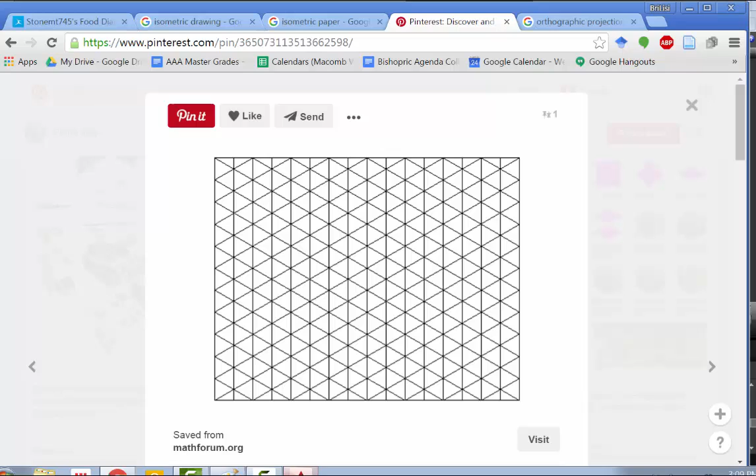To start this out, I need to introduce you with a couple of pictures. First of all, I have a better picture right here of a type of orthographic paper, also called isometric paper. This paper is a series of triangles, each stacked on each other, and it's specifically used for the drawing of three-dimensional objects.

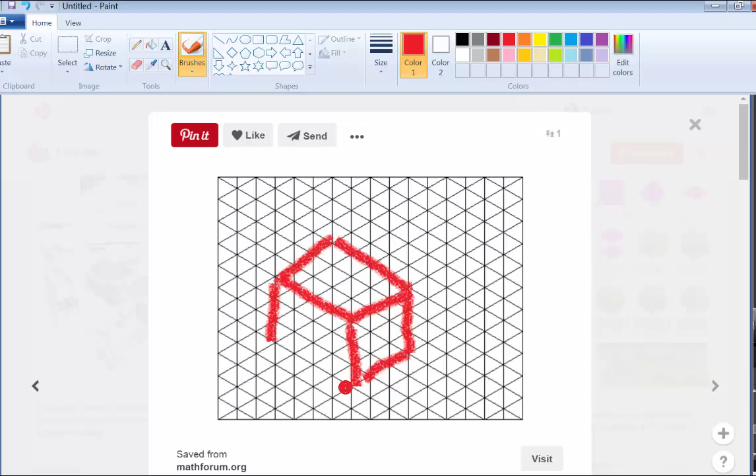I'm going to draw a quick box over the lines, following the lines there. See how that follows. As I follow these lines, I can create not a very good one, but just a basic box of what we're looking at. So this here is a three-dimensional projection, also called an isometric drawing.

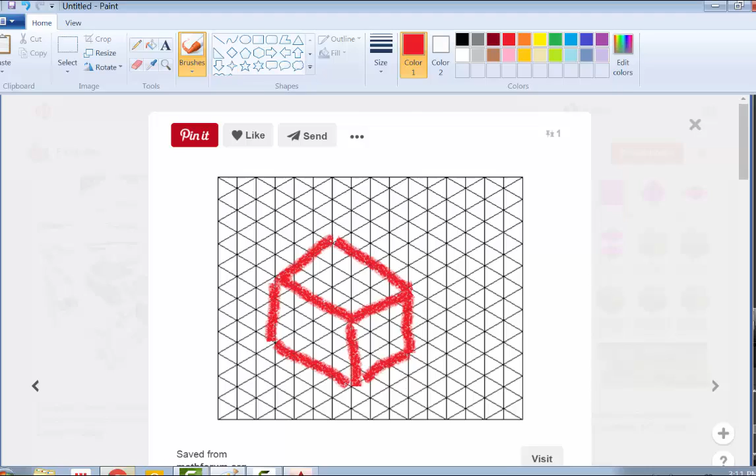So again, I wanted to outline to you the type of paper used for drawing things like this, as well as the projections themselves, as shown on the website there. And lastly, I want to show you something called an orthographic projection. This is from engineeringessentials.com, their website.

On the left here, you have an isometric drawing. It shows the top, and they've labeled them: the front here, and then the right side. This type of labeling is fairly common for basic graphics communication demonstrations. Usually this side that's off to the left on an isometric drawing is called the front, the top would be here as well as this lower section, and then you have the right side.

But on the right hand of this isometric representation, you have each section. For instance, the front is shown as if you were looking at it from straight ahead, straight on. The top is shown as if you were looking at it from directly above the object, and of course the right side as if you were looking straight from the right side.

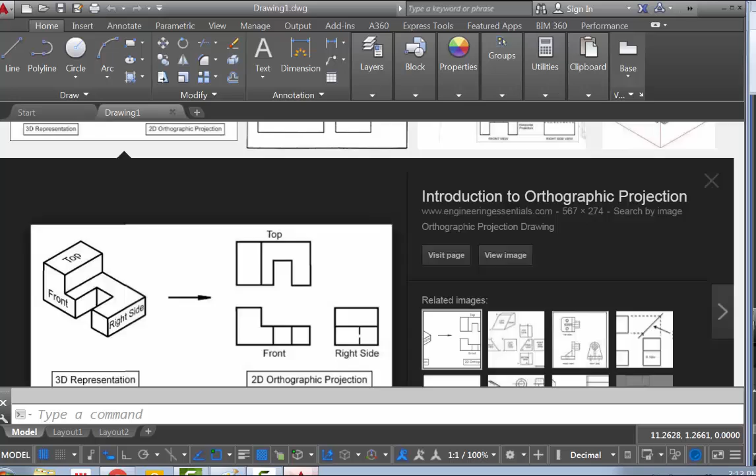This set of projections is called a two-dimensional orthographic projection, and in this case it's a set of three. Typically we call them, in this course, front right top, or top right front, however you want to order that. This is the type of drawing we will be spending a good amount of our course making in this class. Today we will go through our first set of drawings here on AutoCAD, and I'm going to demonstrate some of the basics on how that's done.

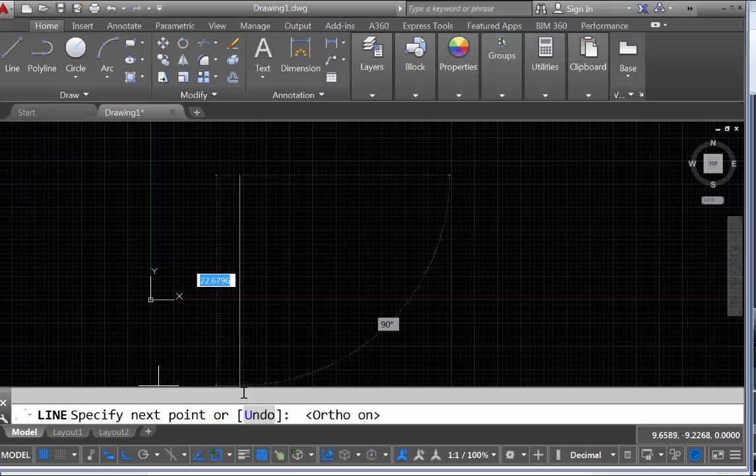So in AutoCAD, I'm going to move around my screen a bit. Typically you have an X and a Y axis. So the first point that we start with in drawing an isometric drawing is we draw an X and a Y axis, on a piece of paper or in this case on the computer screen. I'm going to turn my ortho on so that my lines come out perfectly straight, and then make this about 20, close to 20, and that one about 20.

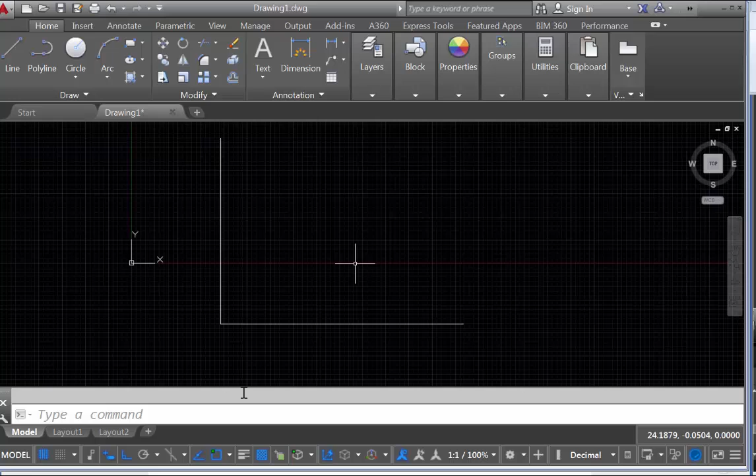Now, for most of the assignments that we have, I'm going to escape a couple times. Most of the assignments with orthographic drawings, like today's, we will start with an X and a Y axis, and then we need to label three sections here. This first one will be—I'm going to put a text here. I'll put the height at about, let's just say 1. I'm going to turn my ortho off.

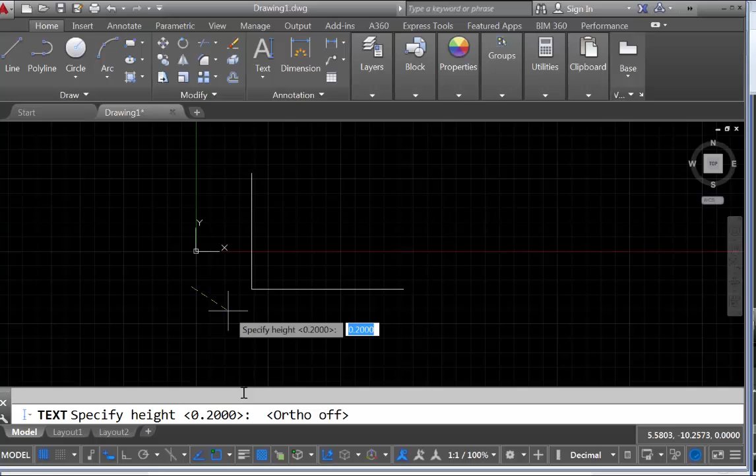Height at about 2, let's go with 2. At an angle, I want it to go left to right, so I'm going with a 0, and then it will leave my cursor there. I can type in 'front' and then push enter and escape.

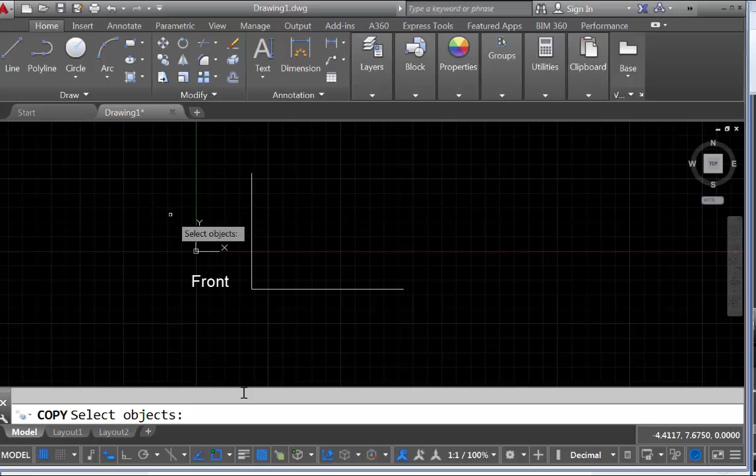Now I'm going to make a copy of this. There's my copy command here. Copy the front—I've selected it and push enter, and then specify a base point.

I'm making a copy of that, and as I specify a base point, I now have 2 copies of the front there, but I also have a front listed there. You may be asking why I'm making 3 copies of this front. Well, really I'm just making a copy to edit the text up here.

So I double click. Oh, excuse me, I'm going to undo that - I didn't mean to move it. So I double click, push Control Z to undo it, double click that and it highlights it.

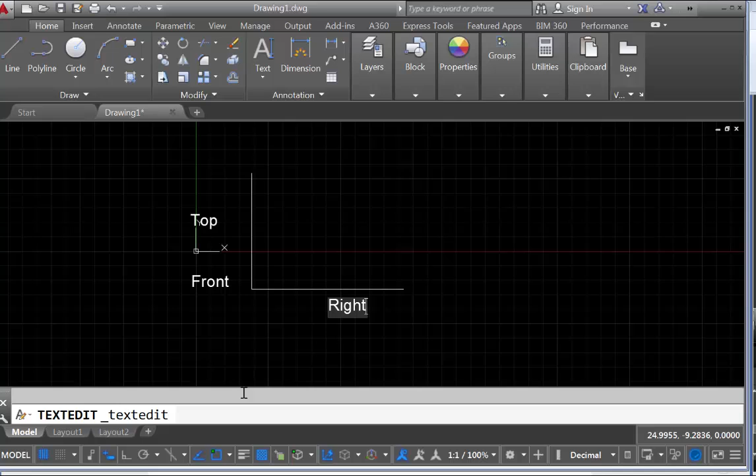I'm going to call this top and enter. I'm going to call this right and enter. Now let's go back to that drawing that I have of the orthographic projection.

You see I have a front, right side, and a top. So my labeling is similar. Also notice that this front drawing, the line here on this edge, lines up pretty well with that top line. And same thing with this right side of the front drawing - it lines up with that.

And that's something that's important to do on a lot of the drawings that we do in this course. Same thing with your front - the top there of the front, as it lines up, it goes to the top of the right and the bottom as well.

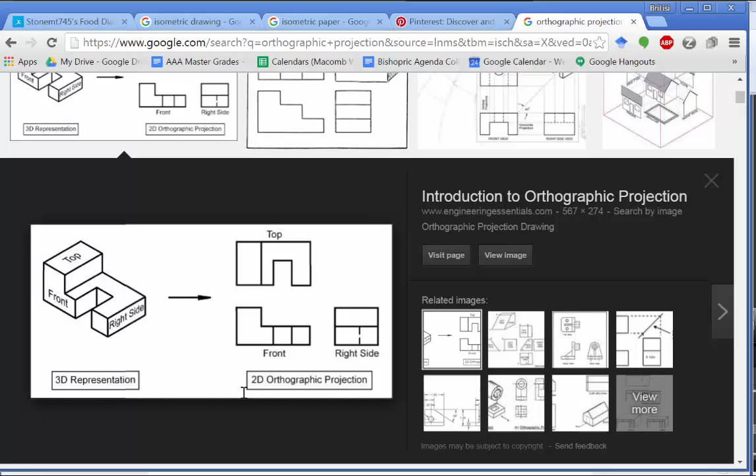So we're still setting up our front, top, right drawing. Now notice here it's kind of in the way of this origin line. So I'm going to go ahead and select everything. I mentioned how to select.

I'm going right to left. So I've clicked on the right, left click, and then go across it and click again. Now I have selected everything.

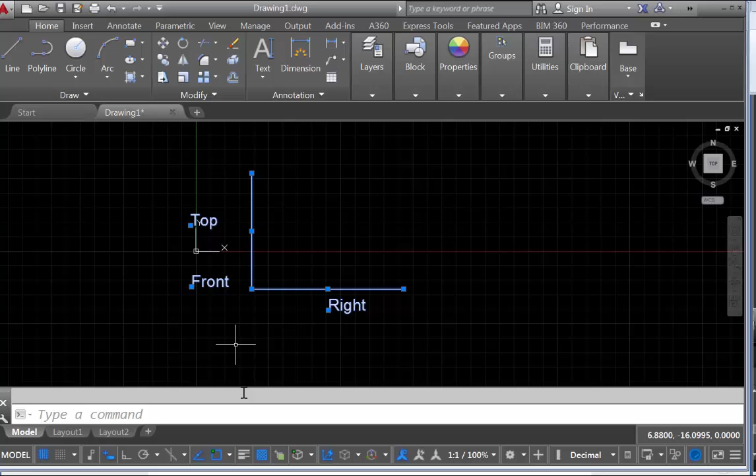And so I'm going to move this whole section. I'm going to specify a base point about here, and I'm going to move it up so it's out of the way there.

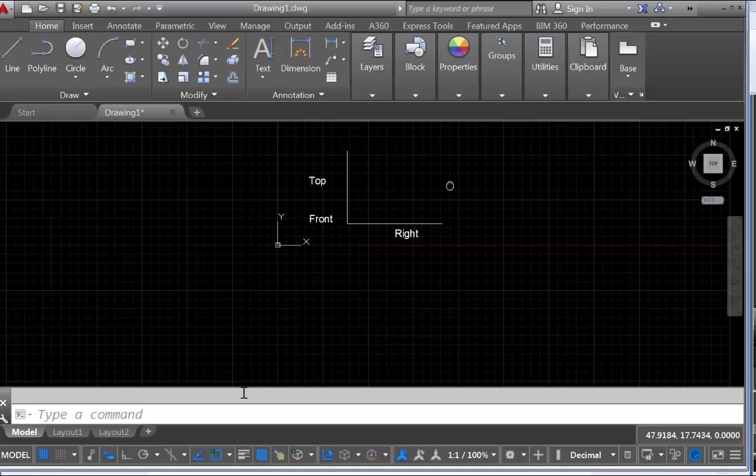Okay, so I'm going to push escape 2 times to make sure I'm out of everything. I'm going to zoom out and then middle click the roller there and then put that section there. So this is my setup for doing an orthographic drawing.

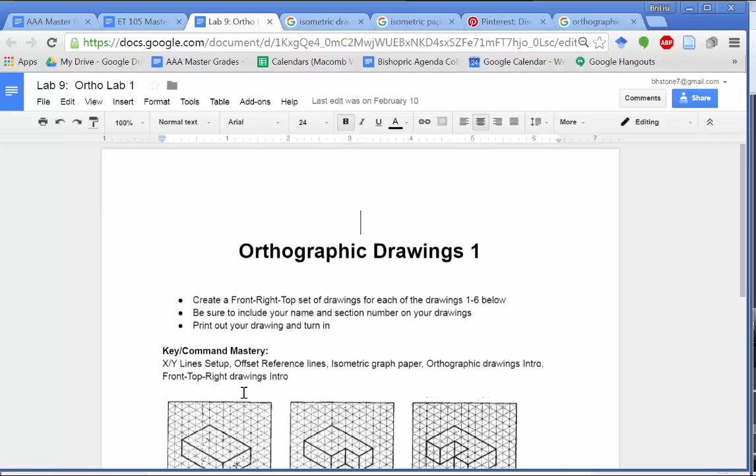Now I'm going to pull up the assignment that we have, what I call the Orthographic Drawings 1 assignment. Should be on the web page there - you can download it. I'm going to shrink this down a little bit so you can see the full set of drawings.

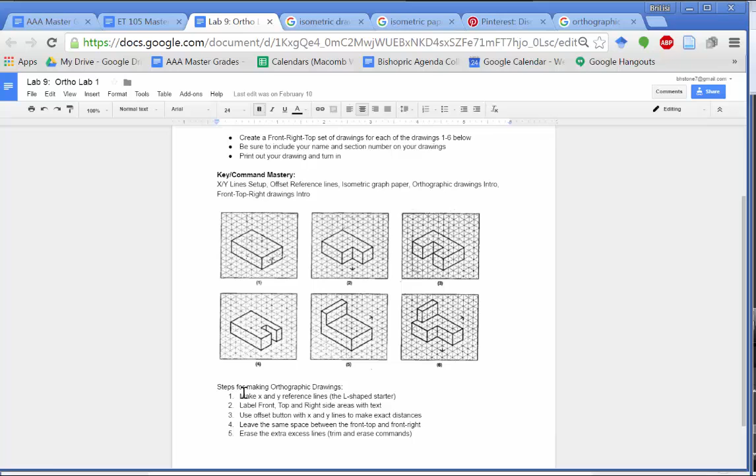What we have here is the orthographic paper. This paper shows 6 different drawings. These are isometric drawings. Notice how each one is about 6 units wide. And if I go close enough, you can see, you can count these off.

So there'd be 1, 2, 3, 4, 5, 6 units there. That's what we'll call the length. And then the height here, if you count that off, it's 1, 2. Same thing here, it's 6 across, 2. It's 6 here, even though this chunk is missing, but it's also two high. And then if you go into the depth, or what you might call the width, that goes in 1, 2, 3, 4.

So you can count off the units listed here of each of these dimensions. This one is a little taller - it's 1, 2, 3, 4 tall, and 1, 2, 3, 4, 5, 6 wide, and also 4 deep. Okay, and then this one here is 4 tall, 6 wide, and 4 deep.

Then you have these little notches listed here, here, here, and here that kind of help you to understand where everything lines up. So this notch here is lined up with that top one. This one here is lined up with that vertical line, and then the other top line there.

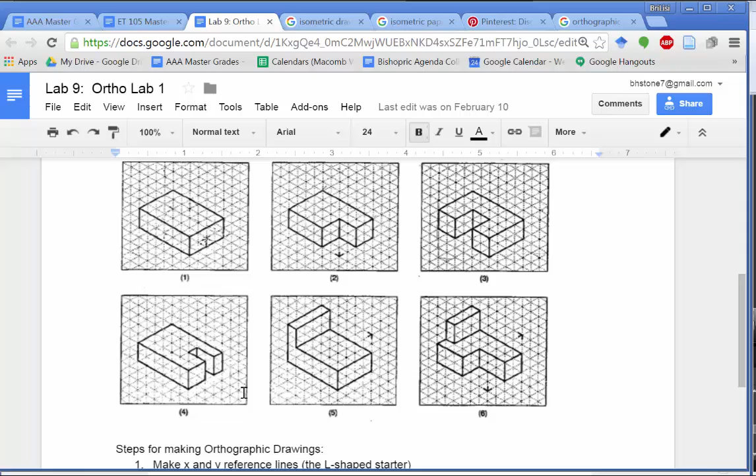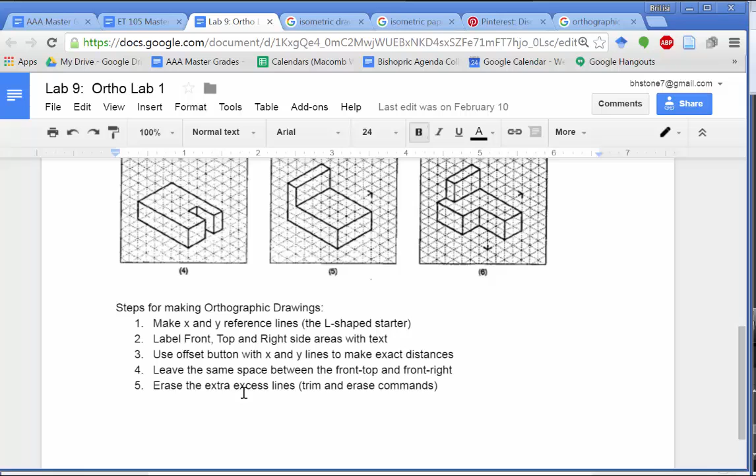So these are the assignment isometric drawings, and what I want you to do is practice doing these drawings, but there's a specific way to do them, and that's listed down below. So first, I'll go through the instructions.

It says create a front, right, top set of drawings for each of the drawings 1 through 6 below. And then be sure to include your name and your section number on your drawings, put that down as text. And then third, print your drawing out and turn it in. Of course, for this course, you just send in a DWG format.

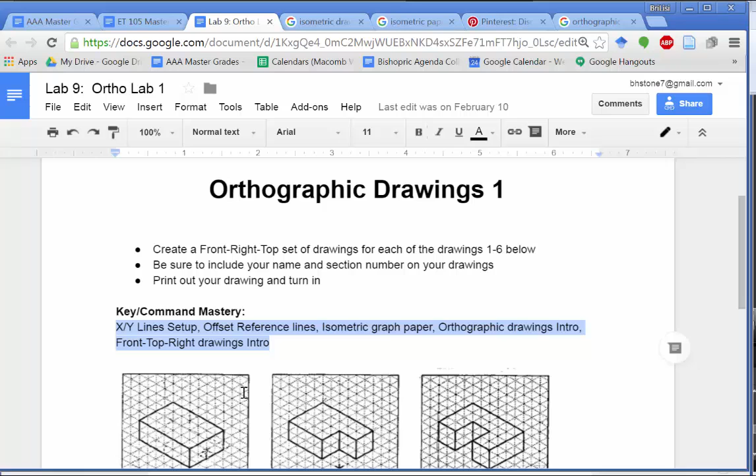These are some of the commands and different concepts that we're learning on this assignment. Then down below, I go through the steps for making this drawing. And so what we've done so far is to make an X and a Y reference line.

That's the L-shaped starter, and I'll go back and forth here - that's the L, I call it the L-shaped starter. Front, right, top labels. And back to the drawing here.

It says label front right top, which I showed you how to do. And then use the offset button with the X and Y lines to make exact distances. So what I'm going to do is set this up in a way so that I can draw it out and so that you can see this easily. Give me just a minute.

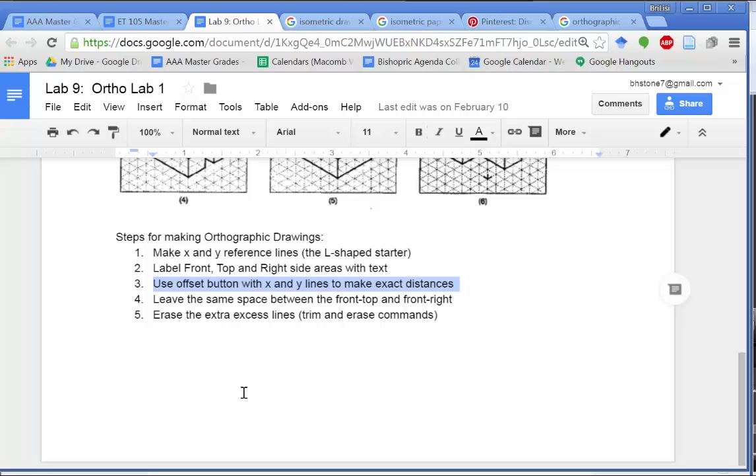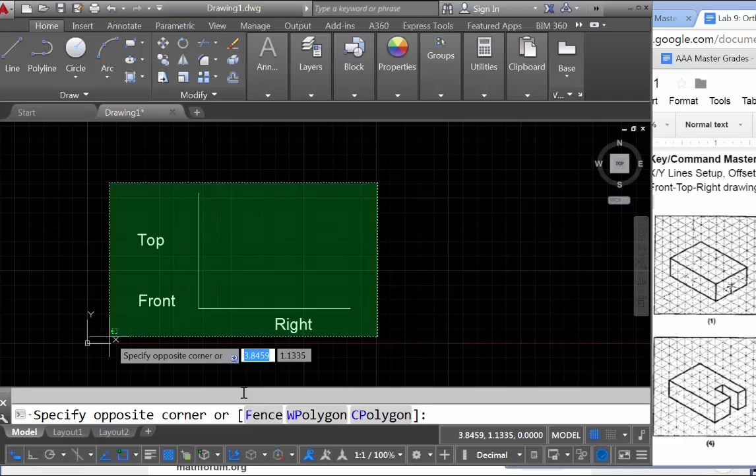What I've done is moved the 6 isometric drawings over and put them on the right side. I've shrunken down my AutoCAD screen to be a little smaller so I can make the first one here. As a shortcut, select this whole section, going from right to left on the selection, selecting everything, then zoom out with the roller wheel a little bit and move the screen over.

Here's a neat trick that helps with several of these drawings, and we'll be doing several like this. Come to the copy command. If I make a copy of that section, I've highlighted it, then copied it.

Now it says specify a base point. I'm going to make sure my ortho is on, and watch what happens as I put my base point here. Left click here, move it, left click here, left click there. Now I'll turn my ortho off and zoom out just a little bit.

Okay, so I'm in a situation where I can't go any lower, and if I roll my wheel out it lets me zoom in, but I can't roll out any farther. I have a problem in that I want to put this copy down lower than that section, but it's too close. I want it further down. So here's what I'm going to do.

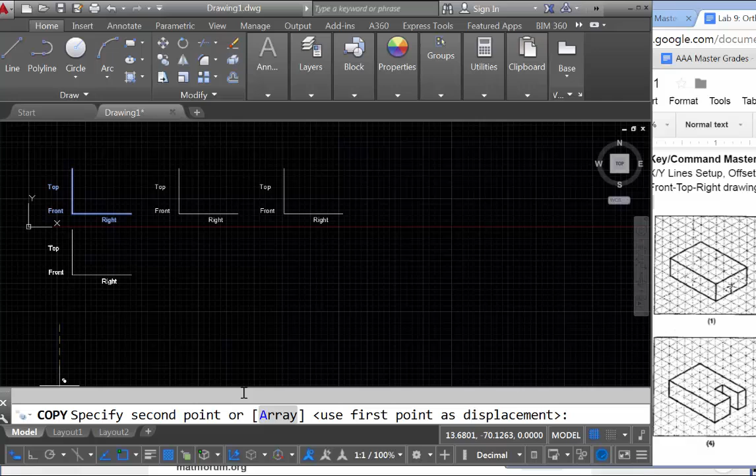I'm going to escape and show you a new command. I zoom in and out, and I can't get... oh, there we go. So I get out of the command and reset my screen. It's a little smaller now, and I highlight again that whole section there.

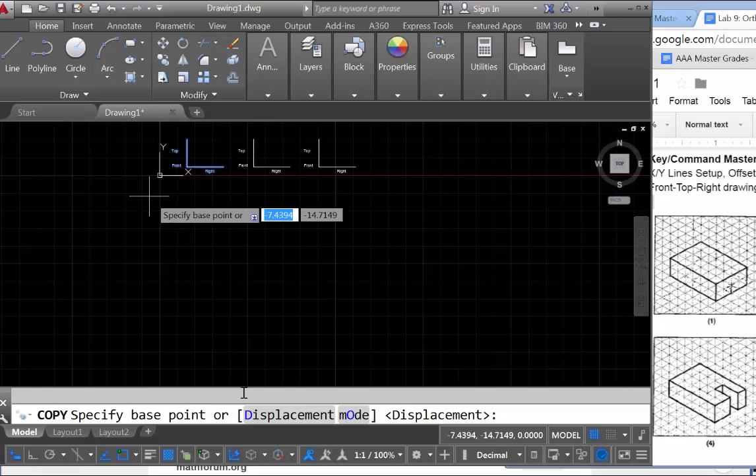This time I'm going to copy. So I've resized my screen there. Now I'm going to specify a base point, there, there, and there. I'll escape twice. So basically, I'm asked on this assignment to do 6 drawings, and I'm set up now to do all 6.

I'll go ahead and put that drawing there, starting with the first one. The first one here is a block, kind of like a brick or a piece of wood, something straight and nice and smooth. So here's the sequence for drawing this block.

We'll draw the front first, then go to the top, then the right side. To draw the front, I want to put it right about here, just like that orthographic projection I showed you earlier. The way you do that is you count off the distance first. This is 6 across this way and 2 high. You start with the offset command.

I'll go offset, remember 6, and click here. I want it to go 6 across. Now I want it to offset 4, and go up 4. I'm going to zoom in a little bit. Oh excuse me, it's 2, so...

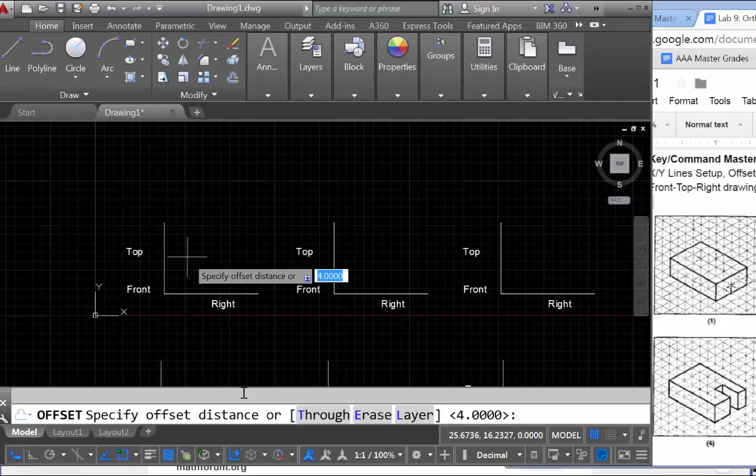I'm going to go ahead and offset 4 across, move it across, and I'm still in the offset command. I'll click on the bottom, and it wants me to go 4 up, but I know it's only 2 high, so I'll put 2 here, enter, and zoom in a bit.

So that front face is represented there. It's as if I took that section and laid it flat on a plane and looked forward at it. Alright, so I have my front section done. There's a lot of extra lines here, but don't worry about that yet, we'll get back to that.

Next, we want to look at the top. We're going to draw the top section, but we're going to put a space between the front side and the top side. So I'm going to do a space of 1 unit there. That's a spacer, that's all. The purpose of that is just to have a gap between the front and the top.

With the top view, now I'm going to push escape a couple times. This line here is represented as this line right there, so to go that direction on this, and of course this is 1, 2, 3, 4. To go that direction would be to go up on this one.

So I'm going to escape out of my selected line. I need to offset up by 4 units. I offset it 4 and put it up. So now this top section here is demonstrated from this isometric drawing.

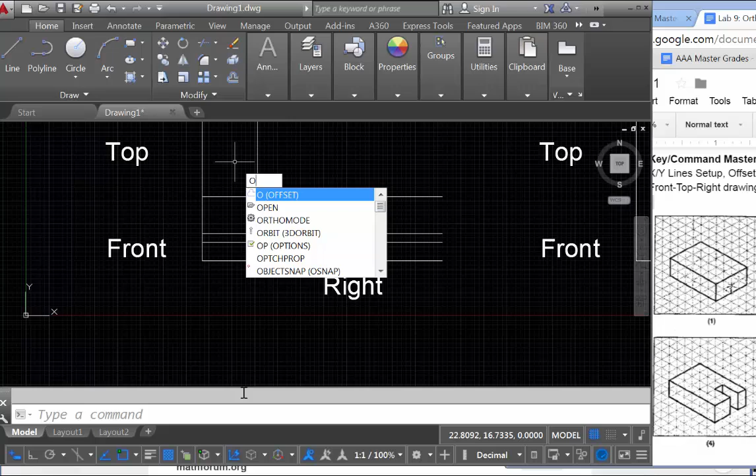Lastly, we'll work on the right side. Because I put a gap of 1 here, I want to put a gap of 1 also on this side. Now I could click on the offset button, but I'll show you a quick trick. If you just type the letter O on your keyboard, it intuitively helps you find the command offset. And if I push enter, that puts me in the offset command.

Notice how it's still listed as 4. If I just change that, because it's highlighted in blue, I can just type in 1 and push enter. Now it's set to offset by 1 unit. I'll do this one on the edge to the right, so now I have a gap on the right between my front and the right side.

So I'm going to erase that out. This line here, right there, is represented in that line there. So I'm going to go to the right of it. Again, it's as if I take this surface and lay it flat on the screen. It's going to go right how many times? 1, 2, 3, 4. 4 times.

So I'll escape out, offset 4, and select this one and go to the right 4.

Now I'm going to use the hatch command. I'll escape out of this. Remember, the hatch command is a coloring command. Just temporarily, I'm going to color in the sections that are represented as the front right here, which is there, the right, which is on the right side, and the top. So that gives you the 3 areas that we are looking at.

Now, the important part is to clean up all of the excess lines that are not needed, not used. They're just used as references. So in order to do that, I'm going to highlight the hatch, and it's highlighted in blue, and I will push delete now. Highlight blue and delete.

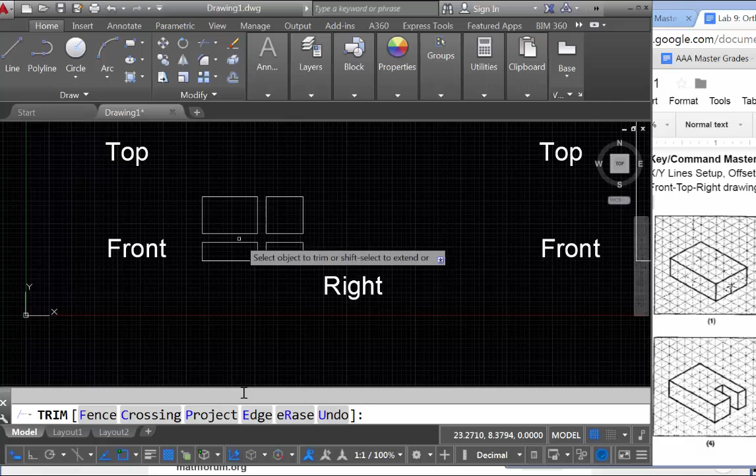And I'm going to go ahead and trim it out. So I can trim, right click here. And you remember you can trim either individually like this, or you can just block out a whole section to trim. So I am blocking out whole sections here. Hopefully it'll let me. It didn't look like it was going to let me there. Oh, there you go. So I've trimmed out everything, and I'm going to try and trim this last one, but it doesn't let me. That's because I need to go with the erase, and I've clicked on the erase button, highlighted this, and pushed enter. And that is my first front right top drawing.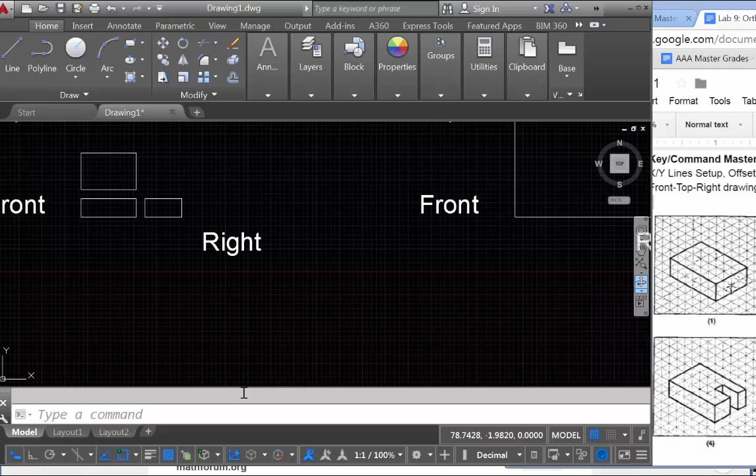I'll do another demonstration for you of another one. Let's just say I wanted to do drawing number 4. Okay, so looking at my 6 drawings, let's say I went 1, 2, 3, 4 would be down here. I will zoom into that and do another quick demonstration of 4. This time I'll do it a lot faster than before. So you know it's 6 wide and 2 high.

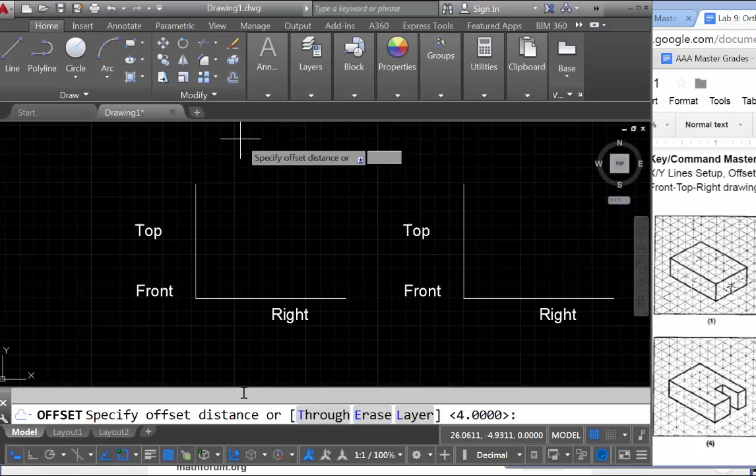So offset 6 wide, and it automatically goes to 4. I'm going to change that mid-command. I'm still in the command. Change that to 2, so it gives me that front section.

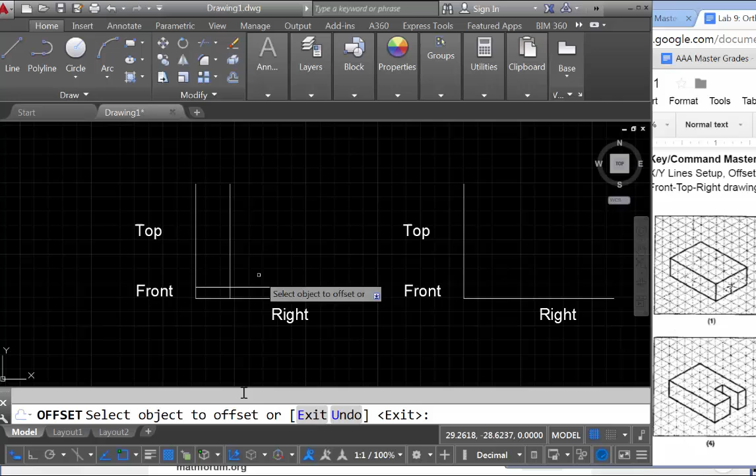That's what I see. Now let's go to the right side this time. But I need to put a spacer. So I'll put a spacer. This time I'll put a spacer of 2, which means I offset 2 and select the object. I'm going to offset that way 2 and that way 2.

Now this offset, I'm going to zoom out. This offset of 2, this gap, is bigger than the 1, and that's all right, as long as I do the same for the right side and the top.

So again, I'm focusing on the right side. Notice on this right side view of the isometric drawing, I have a square section here, which is 2 high, 1, 2, and then 2 wide, 1, 2. Then you have another gap area here, surface. You can't quite see it all, but you pretty much can deduce that it's 1 wide and 2 high. So just keep that in mind. And then same thing here, 1 wide, 2 high.

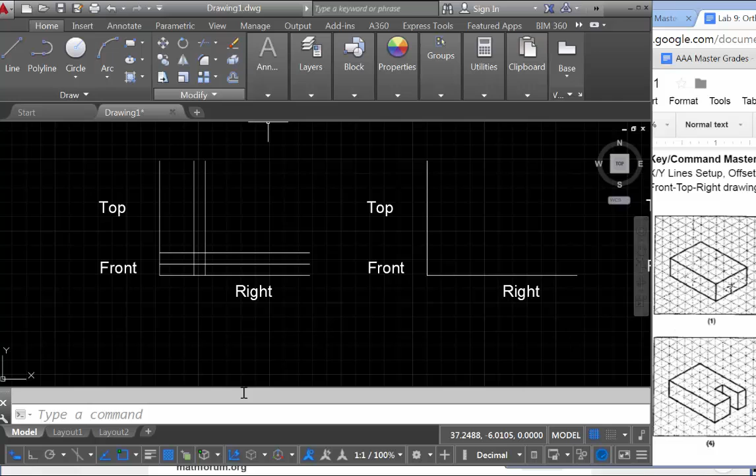So what I need to do is draw that out in this area. I'll start with the left square there. You know it's 2 wide, so I'm going to offset 2 and select that there. That means that this little square there is represented in this section of that face.

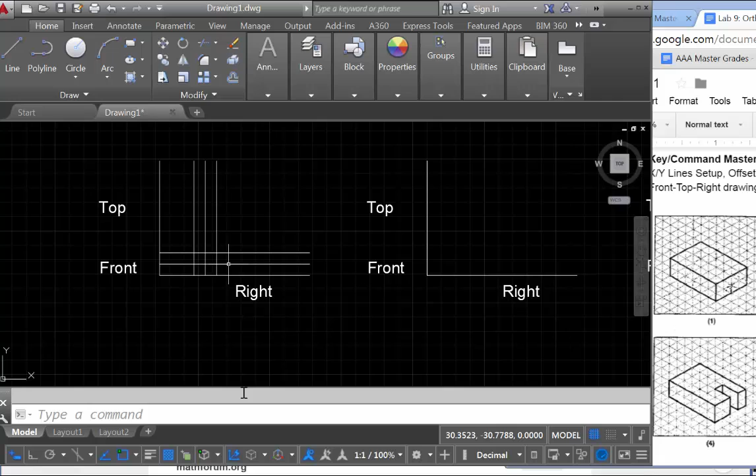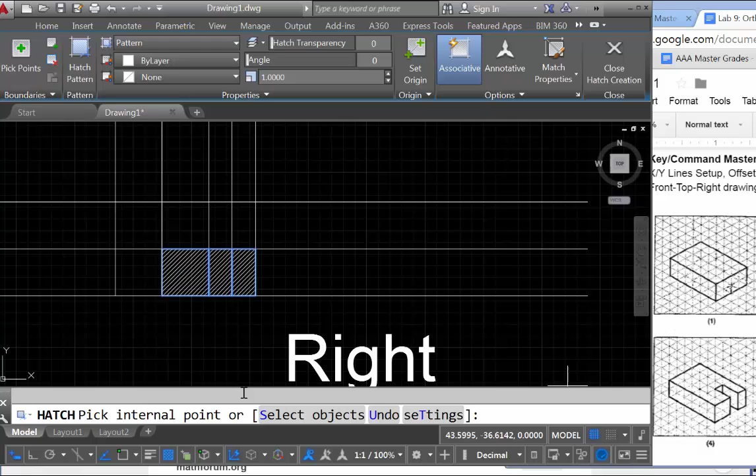Next, I'm going to draw the next two sections. Now, each one is 1 wide, 1 and 1, and then it's 2 high. Well, the 2 high is already there. It's because of the last reference line there. But the 1 wide is not. So I'm going to change this offset to 1, offset 1, and 1. Okay. So I have 3 sections. I'll hatch them all. 1, 2, 3. That are represented from this isometric view.

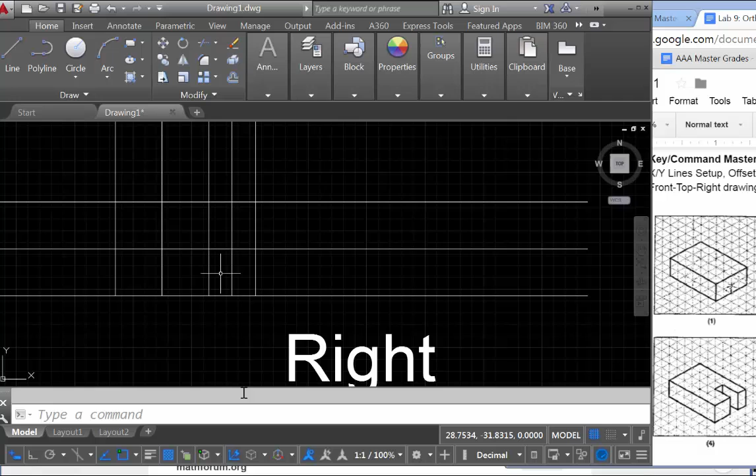However, keep in mind that this middle section, this one here, is deeper than the rest, the other 2. And for the sake of graphics communication, we just let that go and count that as visible. You will know what it looks like by looking at the other angles, the other perspectives. So we're going to leave the right side there and go to the top.

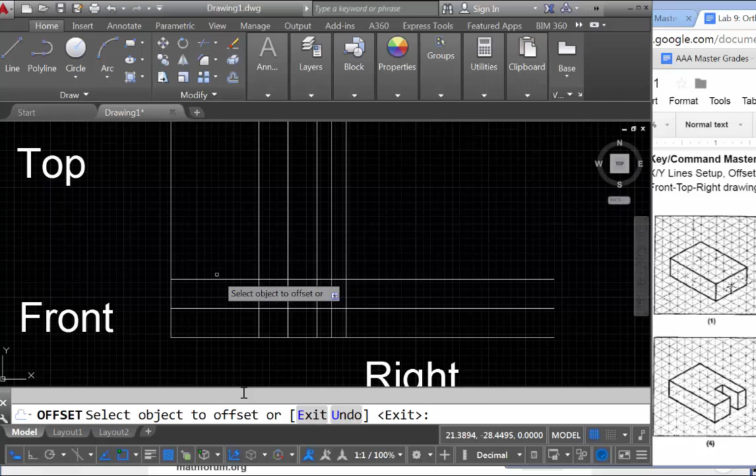Now remember, this top, or this line here from the top, it's a gap of 2. That line is represented along this section there. And if you go upward, or inward I should say, it's how many units? 1, 2, 3, 4. So if you were to take this surface and lay it flat on the ground, it would be 4 high. So we'll change that to 4. 4 there. So this area, I'll highlight it, is represented from this part of the drawing.

Except there's this little gap, this little chunk that needs to be taken out. So let's just measure off. I'm going to take off the hatch first. Let's measure off that chunk. Well, it goes down 1 from that upper section, and then it goes 1 more down, and that's where that area is, that piece that's missing. But then inside, going from the right side to the left, it goes in 1, 2. You can kind of count that off in the drawing.

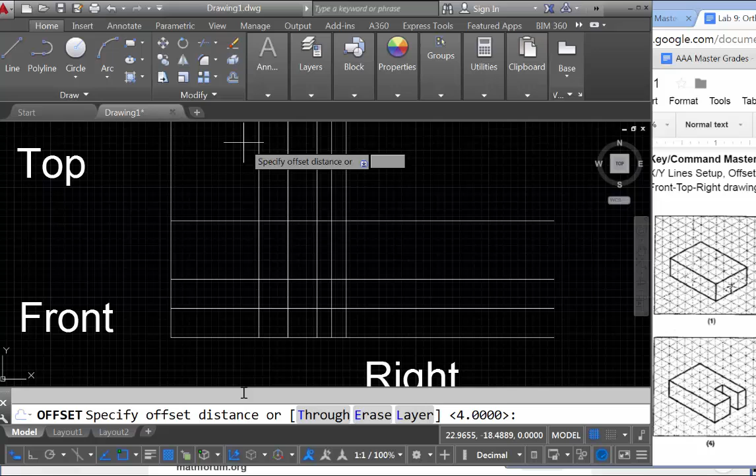So what that means is I need to offset the area. I'll go kind of in reverse. I'll offset the 2 from this section there. That tells you how deep that chunk is that's missing. And then go 1 down and 1 down. So I'm going to offset again. 1, where am I? There to there. And 1 more to there.

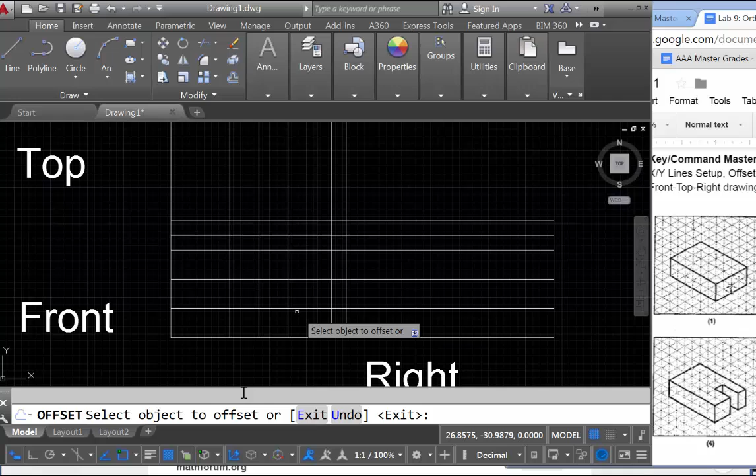Now this ends up being a lot of lines. And it may get a little bit confusing, but it still serves the purpose of helping you make sure everything is precise and exact and correctly lined up. I'm going to hatch out the area. This here is representing the top section of that area there. So I'll highlight that. The last part of this, of course, again, is to trim it out.

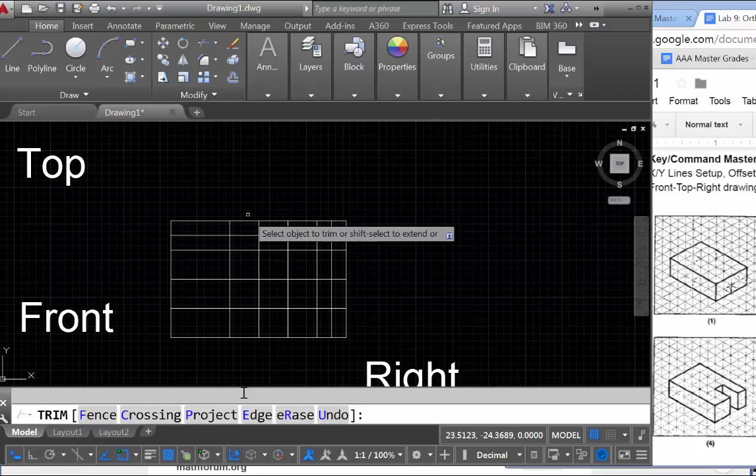So left click on trim, and then right click out here. And now I'm going to quick trim, see how I can quickly reduce these things while I'm in the trim command. I think I'm doing this right. I want to take out things. If you ever do accidentally trim out something that you didn't mean to, let's say I accidentally trim that out, you could just click on the undo button, or just Control and then hit Z. So we're trimming out this section.

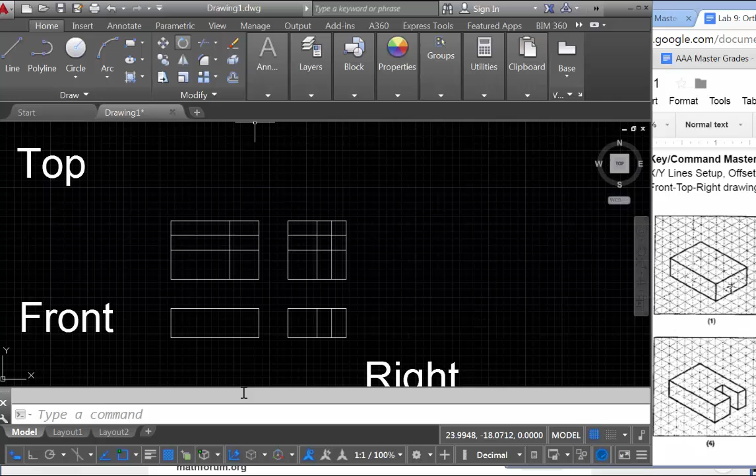I know that this here gets trimmed. I remember that this part here all gets trimmed out. That's the gap area. Now this line here is represented inside, but you can't see it. And so for the sake of this assignment, we are just going to erase it. It's not letting me do it because this line's not overlapping. So if I wanted to, I could just highlight it and push delete. I'm going to go back to the trim command though. Trim and then right click, because I need to clean up this area.

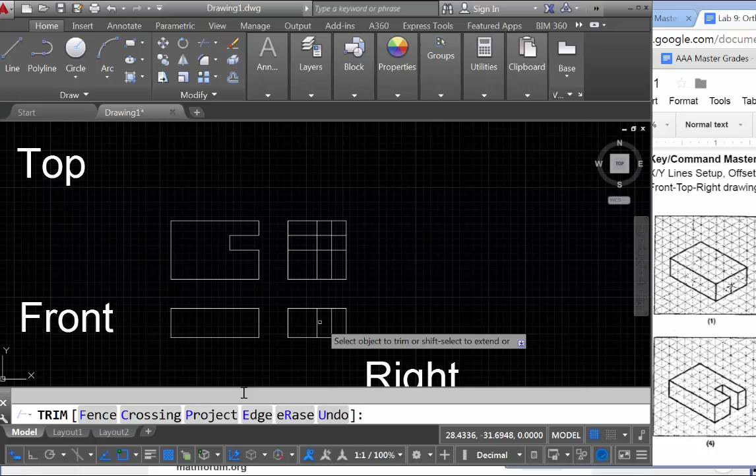So now I need to clean up lines that do not need to be there. Again, this here now represents that top section of number 4. And this one here on the right side also represents, there's the big square, and then the smaller 2 rectangles, each of them 1 unit wide. There they are, 1 and 1. And now I just need to erase this last section. Notice it won't let me trim, so I need to push the erase button, highlight and push enter. So now I have my front, right, top for section 4.

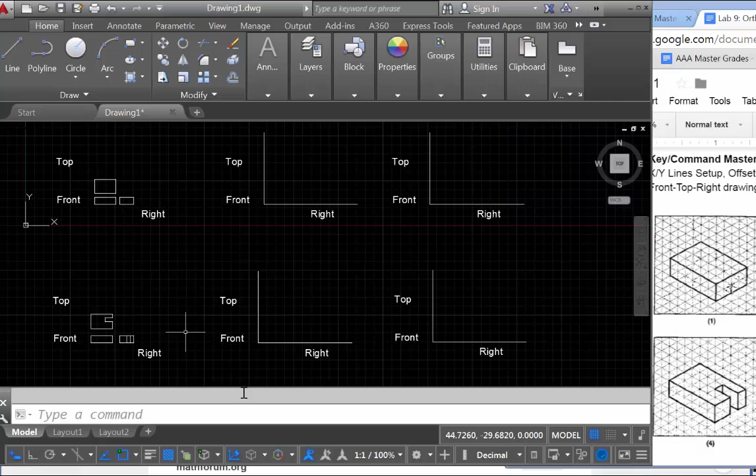So your assignment is to finish all 6 of these. Make sure your name and section number are on there for the online course. And then turn that in. Good luck.